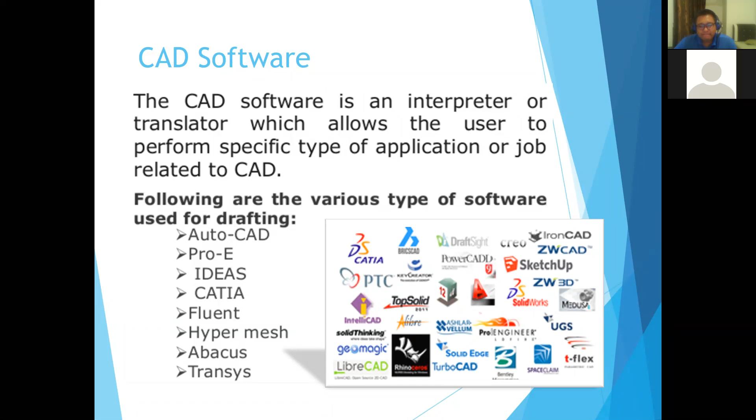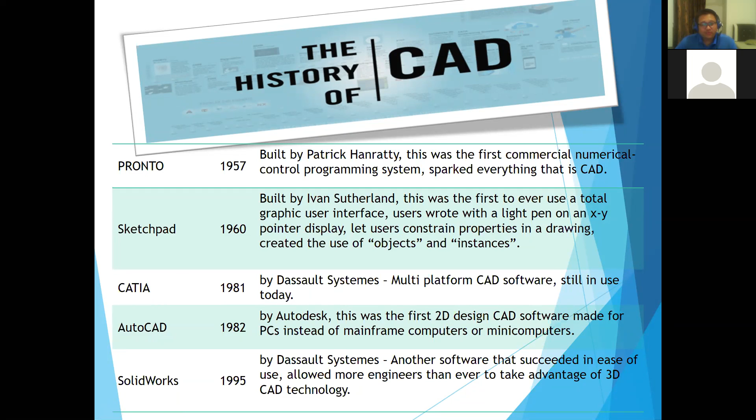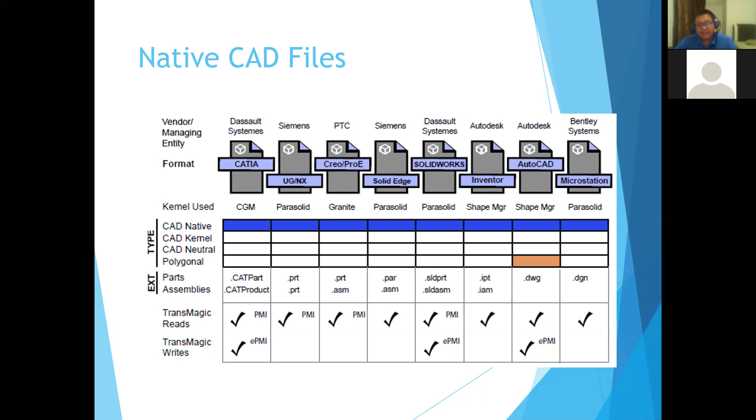And there is also a file format we call .stl. I can't remember what S, T, and L stand for, but that file is very useful because you have to save your part design in .stl format so that you can transfer it into the slicer software. Slicer software is the software that generates the G-code for the 3D printer. And it is a common part that may appear in your life as an engineer.

Unlike the 3D printer, where you do the reverse. You are not starting with a block. You start layer by layer, adding material. This one, you subtract material. Cutting means you remove material. But with a 3D printer you add, layer by layer basically. It's like a CNC machine, doc? CNC machine, subtract, yes. You remove material, you cut the material.

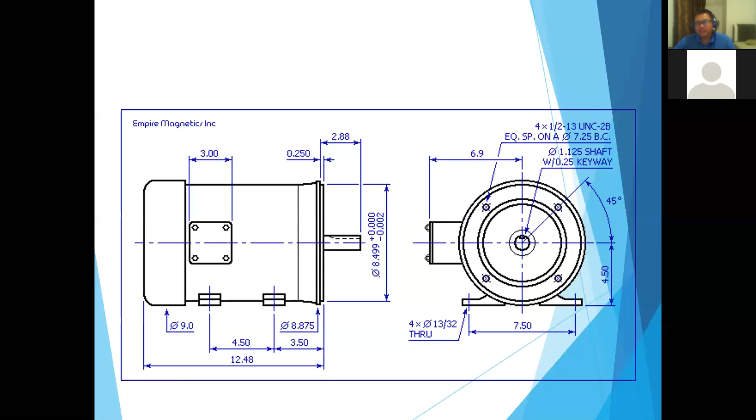Okay, and as I mentioned earlier, the software that is available out there is designed for a certain purpose. Okay, we start with AutoCAD.

Right now, okay, last time AutoCAD you could only do 2D drawing. Until around 2005, they started to work on the 3D version for AutoCAD. Before that, it's just 2D, because I learned when I was in UPM in early 2000. We also had AutoCAD, the version R14 if I'm not mistaken, and that one is only 2D.

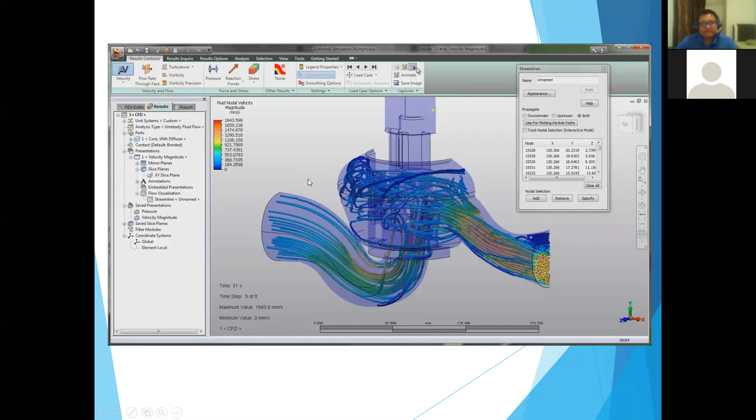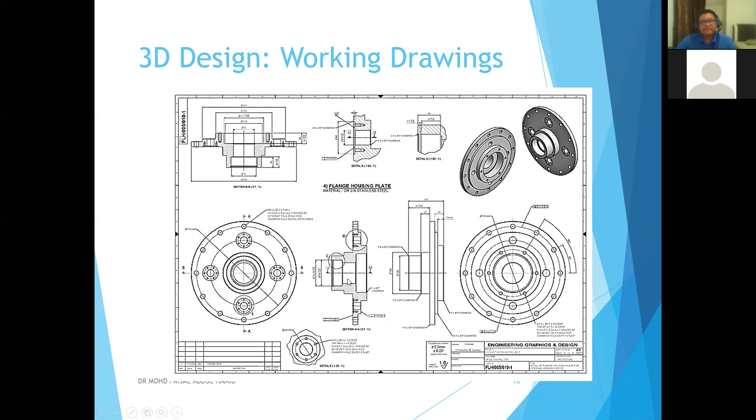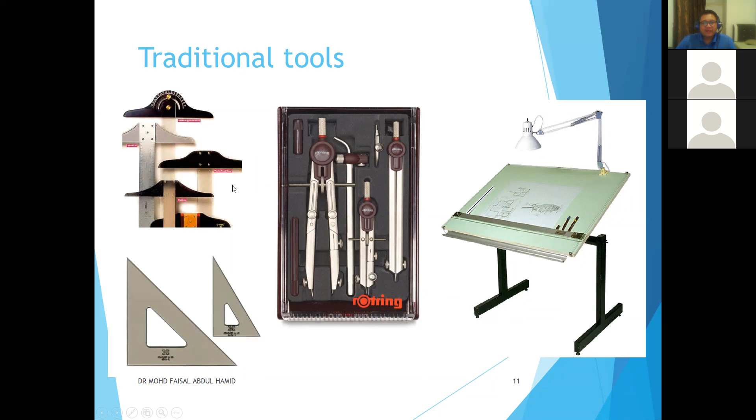Don't produce the parts without doing the assembly drawing first, because two things can happen: the part may not fit with the design, or worse, you may be unable to do the assembly because some screws can't be reached—the position of the screw might be behind a certain object, so you can't reach that point.

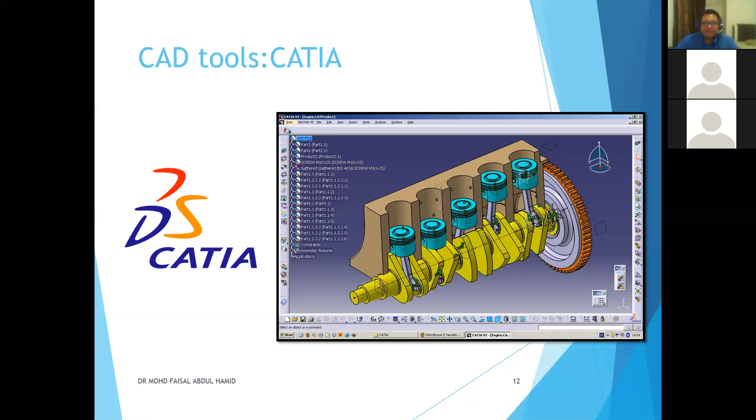Yes, you can produce 3D parts with AutoCAD, but I did try using it. Even on my computer here, I think I have AutoCAD pre-installed when I bought this computer—I'm not sure whether it's genuine, but it's there. I'd say it's close enough, just behind SolidWorks in terms of user friendliness. Last time the 3D capability of AutoCAD was worse, but now it's getting a lot better.

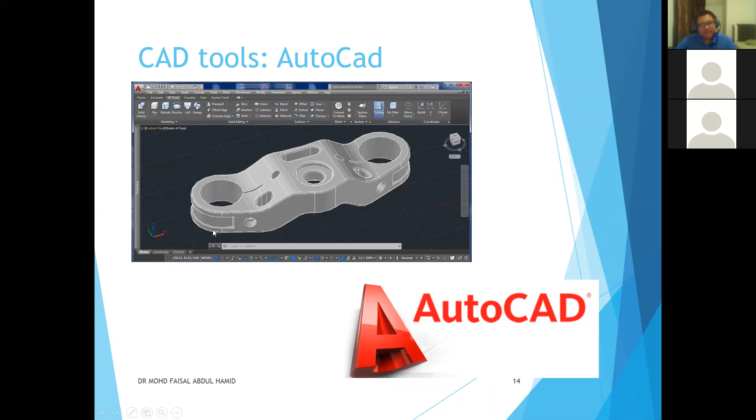The advantages of having computer aided design: of course it is an advanced drafting tool where you don't need a T-square, a mechanical pencil, and so on to do the job. You can visualize your product, navigate and look at many angles on the product you have produced, and it helps improve data organization instead of putting everything on a big drawing like A3, A2, or even A1 size.

You can save it as digital data and transfer it much easier and quicker through the internet and other communication devices. And also, if you save it as .stl, for example, you can send it to the 3D printer to do the printing for the physical part.

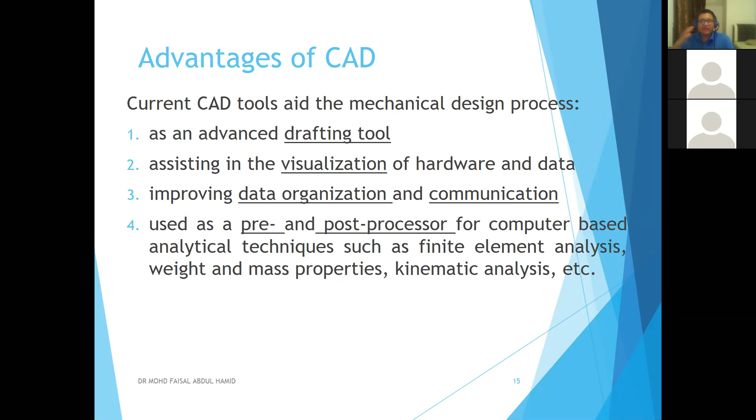Prof, I have a question. Our old method, which is the engineering drawing using the T-square and everything—is that obsolete? Do we no longer produce such sketches?

To be honest, if you are teaching a student, I'm more comfortable starting with the traditional method first, because when you design—we see the top view, side view—when you have a certain object, let's say a car, without the basic knowledge of multi-view, you will have problems knowing how to start, where to start.

You can't really know how to draw, because when you want to produce a product using CATIA, for example, you start with a plane—either front, top, or side, left or right, and so on. So if you don't have that visualization knowledge, I'd say it's quite hard. It's not impossible, but it is a hard process. But if you have the basics, there should be no problem.

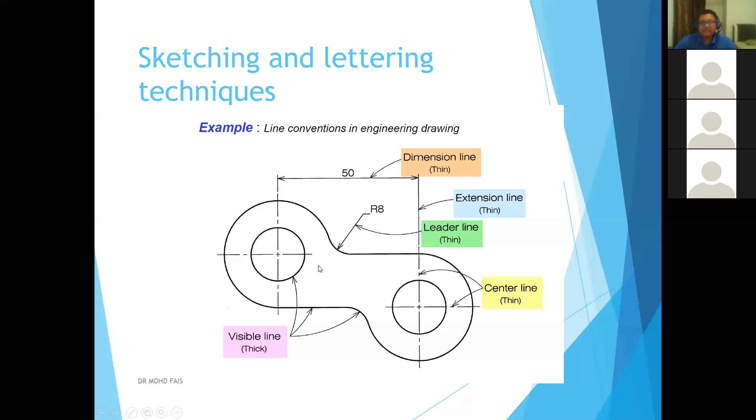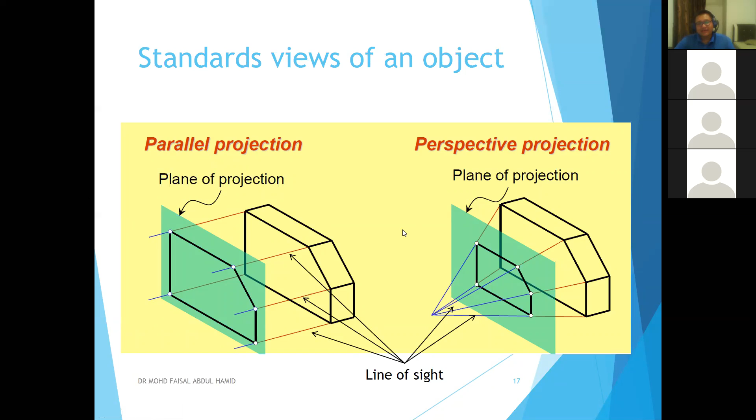This is the projection, where engineers use parallel projection, but architects much prefer to use perspective projection. Engineer on the left, architect on the right—that is the general representation. This is the line of sight.

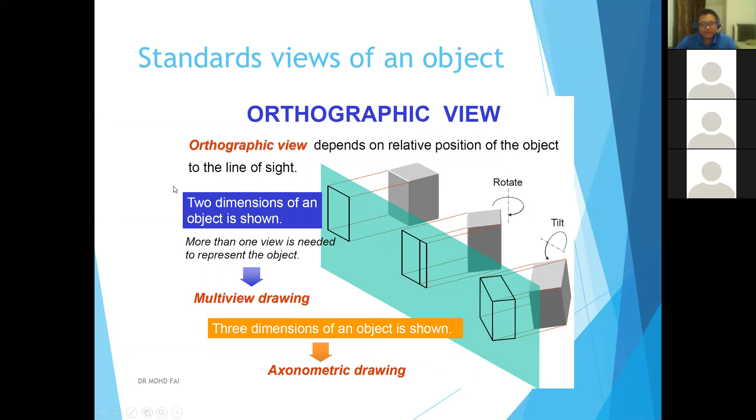And then we have the orthographic view—I think you have learned this before when you took that particular subject—and it is a type of axonometry.

We have isometry. Inside CAD software, CATIA or others, you can choose whether to display the 3D object as isometric, dimetric, or trimetric. The difference is: isometric, the angles are all the same; dimetric, two angles are the same and one is different; trimetric, all three angles are different. So that's the difference.

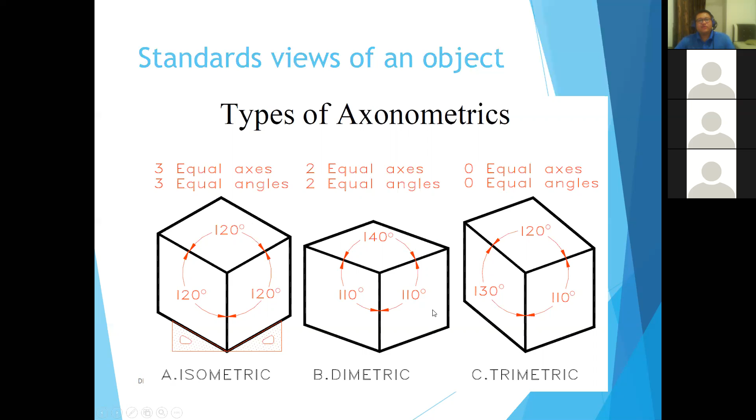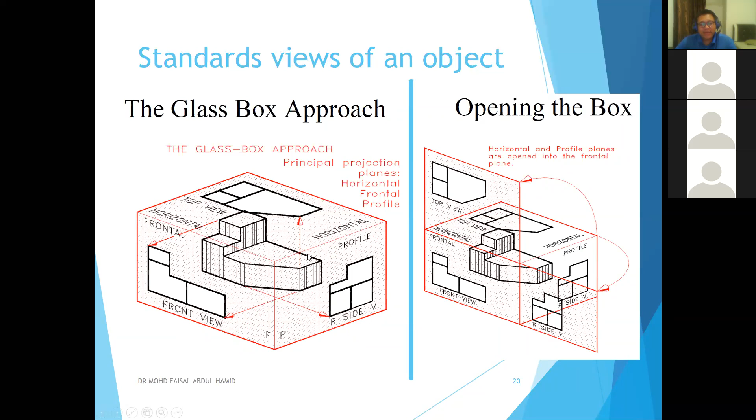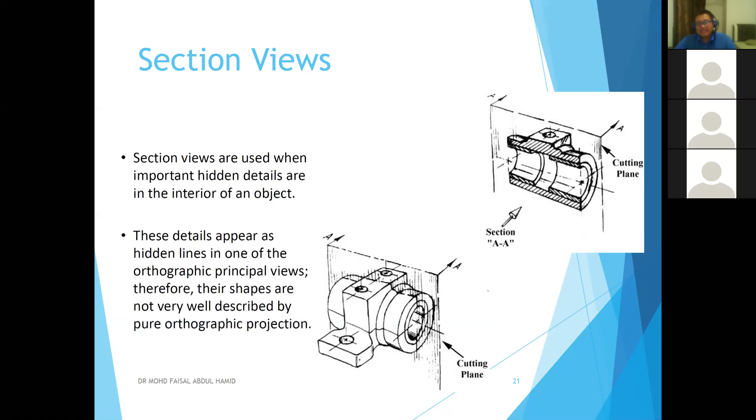The section view is purposely used to see what is on the inside. You can have a cutting plane so that you can see what is going on inside. Even better, let's say you have multiple parts combined together, and you want to see the interference, whether some part might overlap or have a gap. This can be seen easily using the section view.

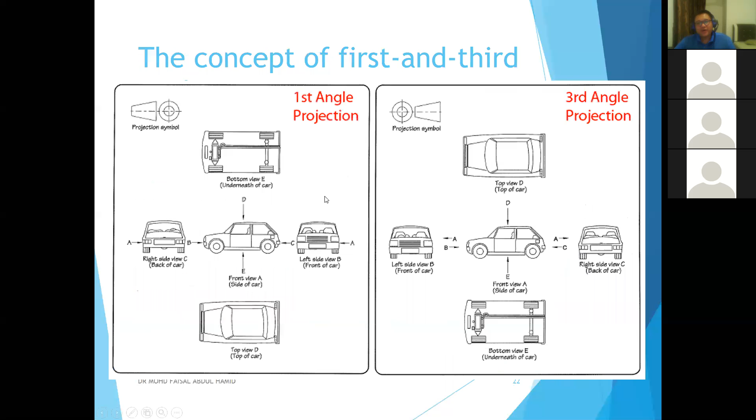I believe you have also looked into what we call GDT, geometric dimensioning and tolerance. This is very important for CAD design because it will ensure that the part can be assembled and fixed nicely.

The reason is, let's say you want to do a cutting process, or you want to print out certain parts using a 3D printer. Each machine that you are going to use has a certain limitation, the accuracy of the machine itself, so to comply with or meet that accuracy, we have to include that into our design.

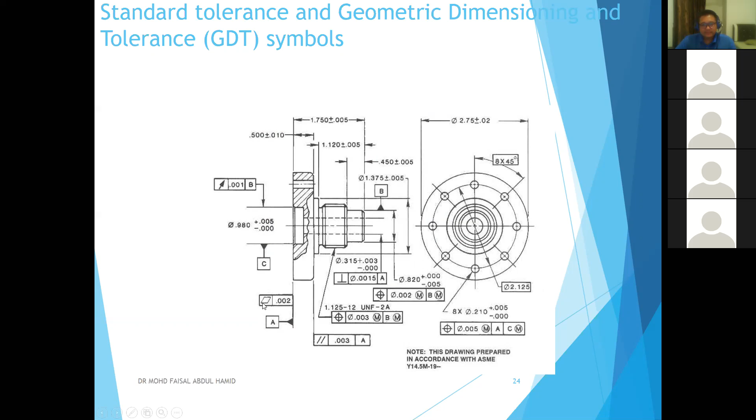Each machine has its own specification, its own precision. So that particular machine precision, you have to take into account in your design. That's why you will have this plus and minus on your drawing. This is the tolerance.

To fit this particular slot down here, there is one block that goes down to fit inside this slot. The minimum size is 0.495, and the maximum size is 0.497. You can see that this value is within this particular range, in the middle somewhere, so this part can fit into the slot easily. That's why tolerance is very important, so that when you have an assembly, it helps ensure whether your parts can be assembled or not.

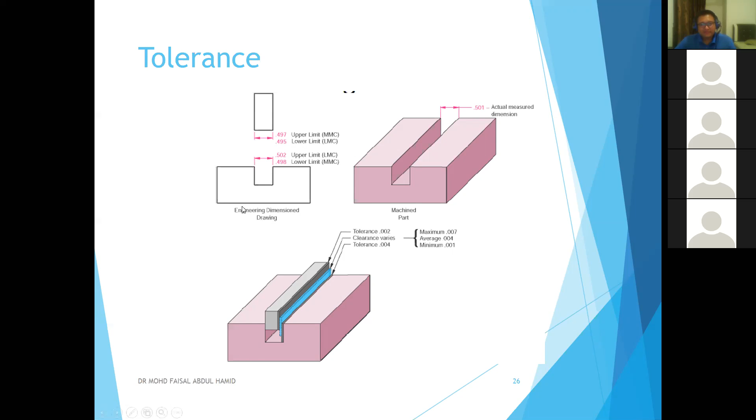Moving on to 3D printing. As I mentioned earlier, for traditional manufacturing, where we have a machine like CNC cutters and many other types, you normally start with a block. Then you cut it, and you can see that some material is removed, so you have a lot of leftover.

However, with additive manufacturing, the process is reversed. Here is the animation of the 3D printer, where the machine actually starts from the bottom. It creates one layer after another, and goes on and on until it finishes.

But it will also have leftover. This is because when you want to perform this printing, during the printing process there's what we call the bed, the printing bed, the square shape down here. There is a printing bed, and it will be heated up. There are two methods that we normally use.

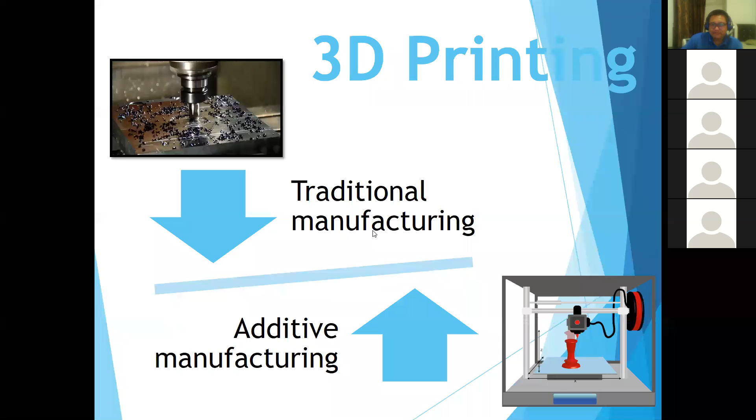But the fundamental issue is that the melting temperature of ABS is different compared to PLA. If you set this heated nozzle to around 180 to 200 degrees, then it is for PLA. But if you increase the temperature to like 190 or 200 to 220, then it is suitable for ABS. So the melting temperature is different.

That's why I don't think that will work as it is, unless you have a very complicated system installed. On the current machine we have, it will not work because the melting temperature is different. Since it produces layer by layer, this layer will not join with the new layer, because one is, let's say, 180 degrees and the other is a much higher temperature. It will cause some problems.

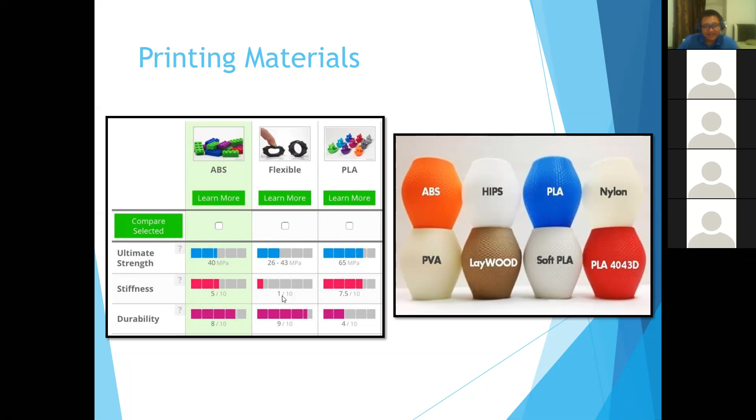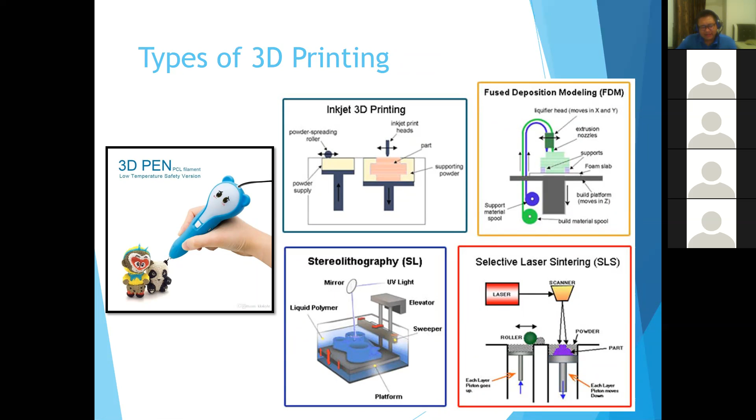So instead of using material like this one, they use some sort of powder. I'm not going to discuss this one in detail because this machine is super expensive. I think we have one that belongs to the mechanical department, if I'm not mistaken, and it cost about 1 million for just one machine. So it is very, very expensive.

On this slide we have the FDM 3D printer, and I'd like to highlight that there are two types of mechanism available: either Cartesian or delta. With Cartesian, there is a motor down here, on this side, and up here. This motor controls this motion, the motor on this side controls this, and the motor up here controls up and down of the heated bed, located here.

For the delta machine, down here is the heated bed, and up here is the heated nozzle where the material goes down. On this machine, they use some sort of actuator to control the motion of the heated nozzle.

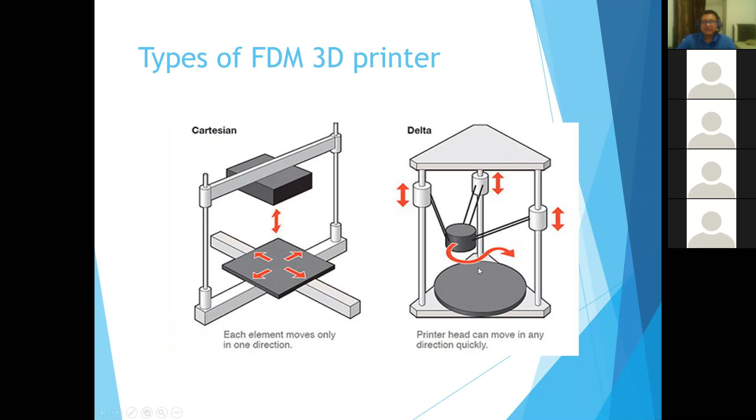Okay. Generally, people prefer this one, this machine, Cartesian. But let's say you want to print out a vase for your flower, right? A vase or labu sayung, for example. Then this machine will do much better compared to this Cartesian one, because this machine is superior in producing a product which has round shapes. Okay, so that is the general difference.

Okay, this is the basic filament that we have. It is a roll. One roll is 1 kg, and then the yarn, I don't know what to call this one. The yarn will be fed through this feeder, and inside this feeder there is a small motor that will push or pull this particular yarn, push it upwards. If we refer to this image, it will push upwards away from the spool, then going here, and push the yarn into this printing head, and inside the printing head we have the heated nozzle.

Later on, after the PKP or MCO has ended, I can bring you guys to the lab and you can see the machine physically. We can let it run, you can feel it, and you can also learn how to use it on your own.

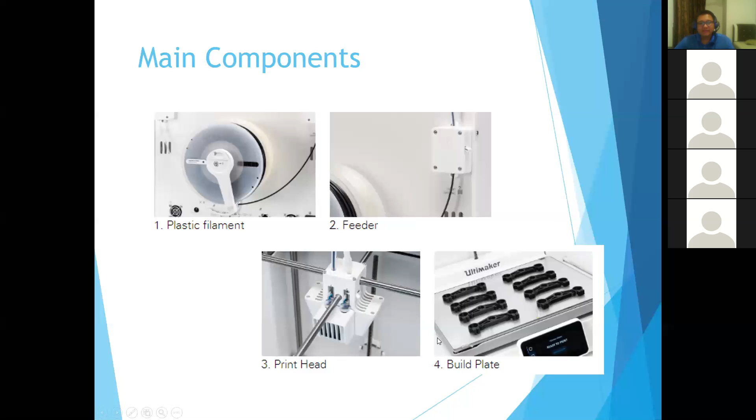Okay, how does it work? Of course, start with ideas. If I link it with our course, it may start with the requirement analysis. You do the survey, Pareto, and then QFD. You get all the information, then proceed with the morph matrix, and after the morph matrix, you analyze your concept using the Pugh matrix and also TOPSIS to get the final specification or final design concept that you want to produce. Only then do you start the CAD design. So what we have learned is this part.

After the CAD design is completed, you will use the slicer software, or what people also call 3D printer software, to generate the G code. Don't forget, when you do the CAD drawing using CATIA or SolidWorks or any other CAD software, make sure you save that file as .stl. Then you can transfer that file into the slicer software. In the 3D printer software, you need to specify the orientation of the printed object, the scale of the object, and some other required setups.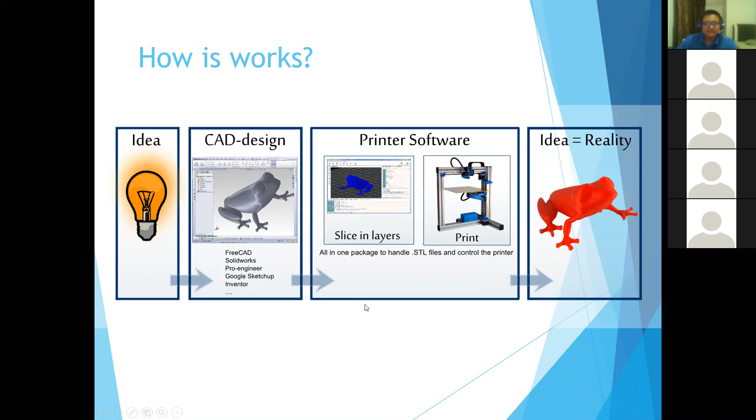It will take a while, depending on the dimensions, accuracy, and many other things, like the printing speed and the heating process. All those parameters will determine the time for the printer to complete the printing. And finally you will have your product. If it is a frog, then you get a frog. That is the more specific process that I explained just now.

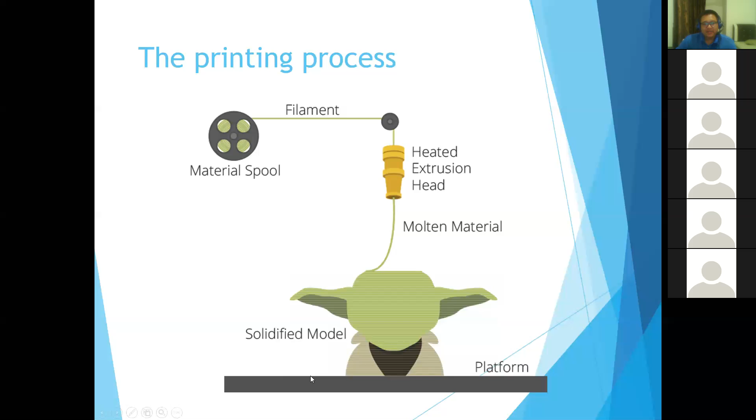Another way to visualize it: you have the material on the spool, normally 1 kg, and it goes through this feeder, which will push or pull the filament into this heated extrusion head, which we also call a heated nozzle because its shape is like a nozzle. Then the filament will melt and be deposited on this platform down here, the heated bed, layer by layer.

Okay, and 3D printing software. Just like CAD software, there are many types of 3D printing software. I list them up here, and it depends on who you are, whether a beginner or an advanced user, and also your operating system, OS.

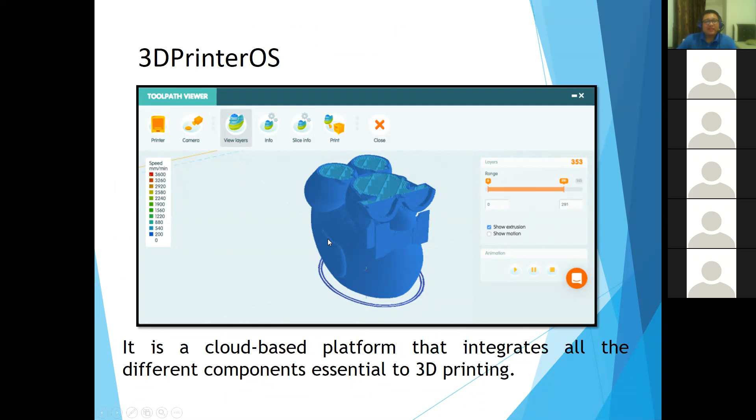Okay, 3DPrinterOS. Here, it is a cloud-based platform that integrates all the different components essential to 3D printing. Okay, it is a cloud-based platform. And then this one is called Craftware, developed in-house by a 3D printer manufacturer.

Normally, okay, this one I would like to highlight. With certain printers, you can use any apps, most of the free apps that you can download. But with certain printers, you can only use their dedicated software. It will not work with other software.

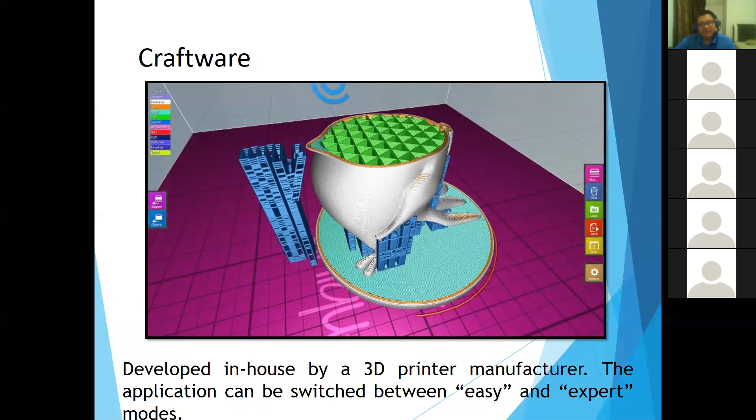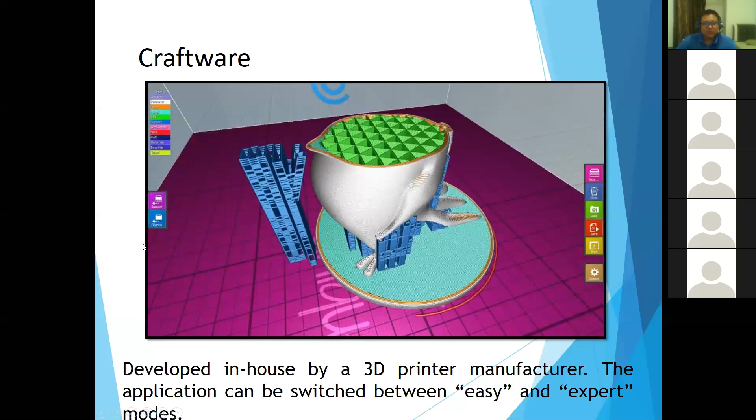And another type of printer, they have their dedicated software as well as dedicated printing material. You cannot change that. So for me personally, you'd better buy a 3D printer which accepts any software and any type of material. So you have freedom. Otherwise, you will have a problem getting the material and updating the firmware. Okay?

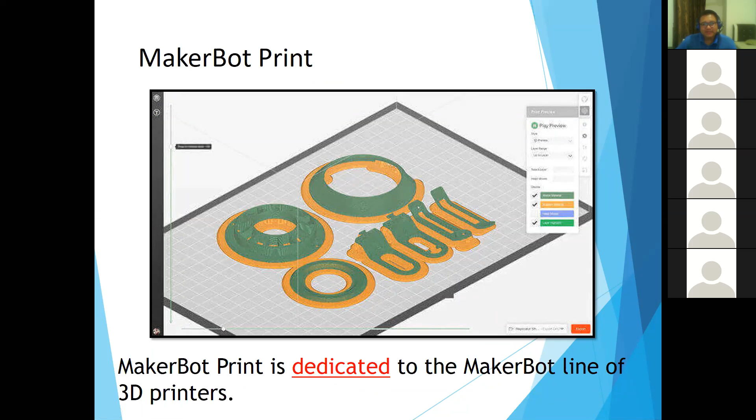And this one is MakerBot Print. The software is dedicated to the MakerBot line of 3D printers. So I'm not really happy with this type of machine. Okay, and then SelfCAD, 2-in-1. It allows you to design your own model and set it for 3D print. I would say this one is good for your kids at home, if you plan to buy one small 3D printing machine.

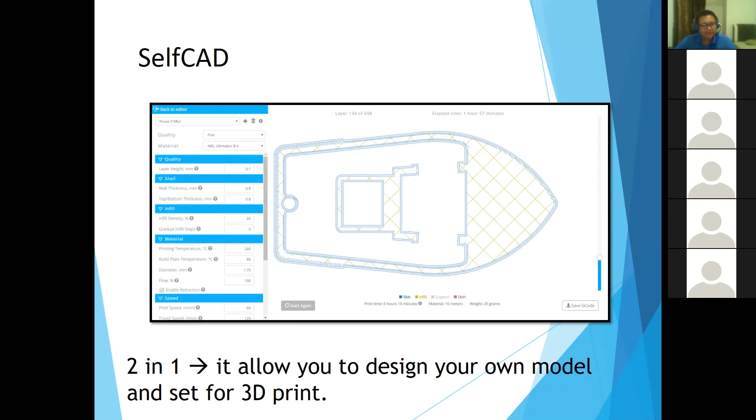A good 3D printing machine that you can buy right now is called Ender 3, Ender 3 Pro, and it costs just under 1,000 ringgit. You can buy that one, it is a pretty good one. I have one in our lab, the aerodynamic lab.

And this is the software that I'm using right now, Simplify3D. This is not free. You have to purchase this particular software. Right now, I have 2 licenses, and it cost me around 500 to 1,000 ringgit. I can't really remember, but it cost me less than 1,000. It is a lifetime license, perpetual license. No need to renew.

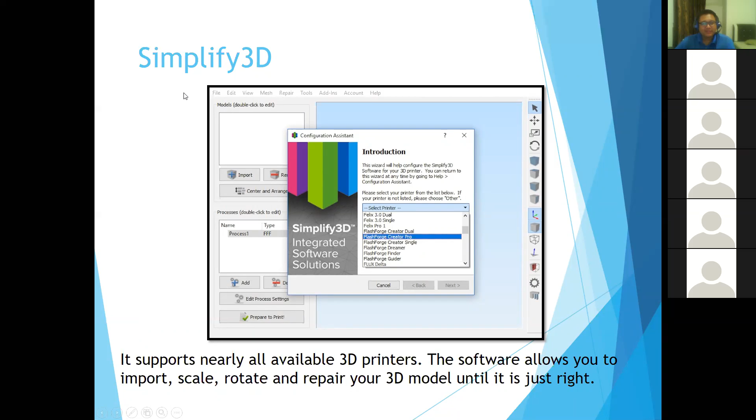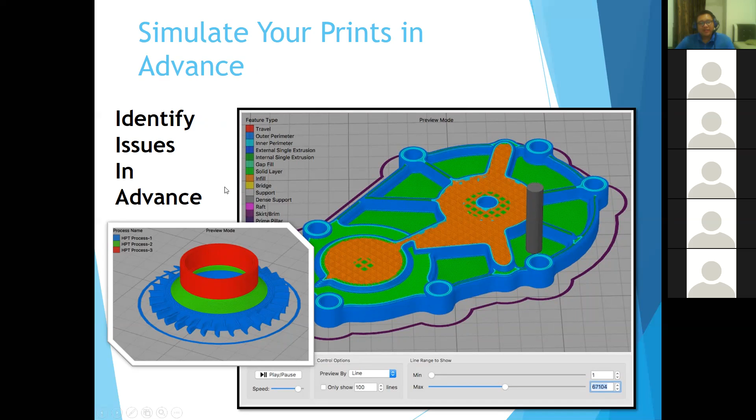And this particular software will work very well with many types of 3D printers which are not the dedicated type. And with Simplify3D, and some other software as well, not all, you can simulate the printing process so that you can identify issues in advance before you start the actual printing process. So it is very useful.

Okay, now if you recall just now when I talked about the traditional method of producing parts, where you start with a block of metal, for example, then you send it to the machine to do the cutting, right? Then you will have leftover, and there is a lot of leftover. For 3D printing, you will still have some leftover, but it is very minimal compared to the traditional method.

It is not 100% clean or totally zero waste. With a 3D printer, you still have some waste. The reason is, when you print something, let's say an object that is very thin and tall, then during the printing process, the bed will move sideways.

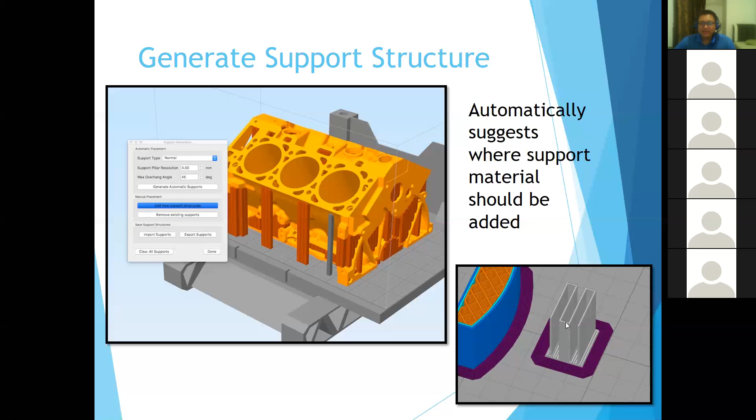And if you have a very tall object, you might need a lot of extra surface, so that your product will not fall off. That's why you have this kind of skirting, the outer layer here, to let your parts or your product adhere to this particular surface.

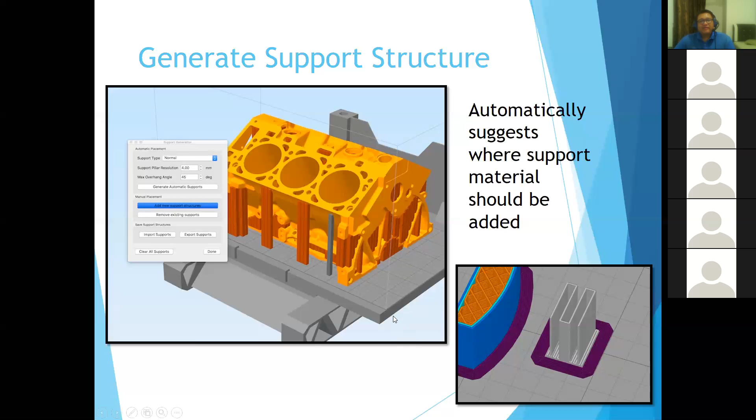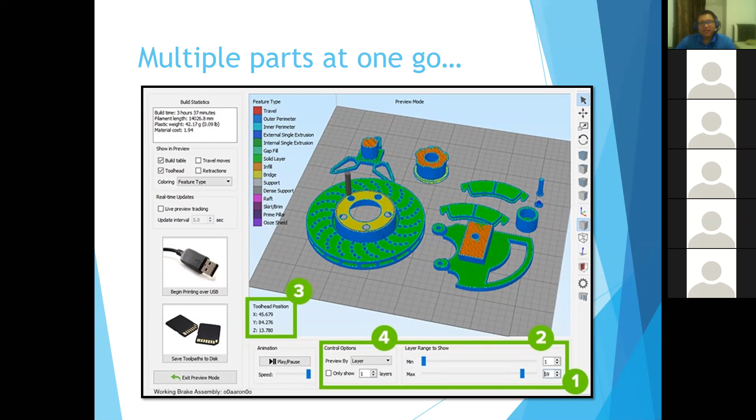And you can print multiple parts at one go, but for beginners, I think you have to do it one by one. Don't do this process. Probably after at least 6 months or 1 year of being familiar with using a 3D printer, then you can start thinking of printing multiple parts at one go, because you need a lot of experience using that particular machine. Every machine has different characteristics, so you have to learn them first.

Variable printing settings, I don't want to go deep into this one. This one is very important. Just now we saw a frog, right? You might think that inside the frog is hollow, nothing inside, or you might think that inside the frog is full of material. But you can control whether it is hollow or solid inside the body of the frog.

Here there are options. You can put 10%, 15%, 20%, 50%, 70%, or any percentage of material inside that object, in this case the frog. This is what we call the infill density, the density of the material inside the object, and you can control it using the slicer software or 3D printer software. There is an option for you to control that density.

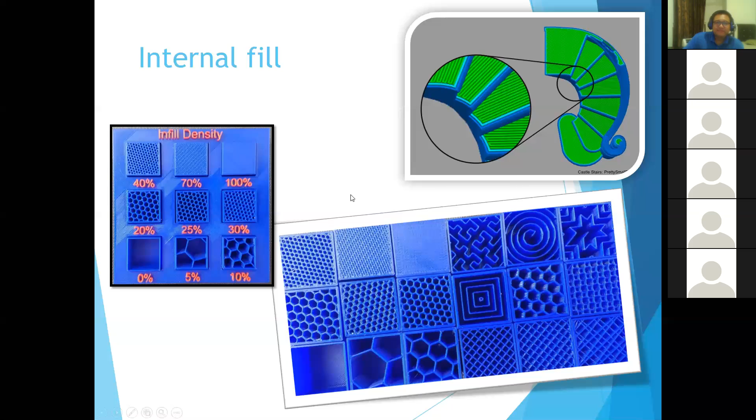So that's why I told you that you need a lot of experience using the 3D printer. Then you will appreciate how to select different types of inner shapes, inner layers. Okay.

And last but not least is a typical 3D printer, the cheap version. It is very exposed, like this one. So if you want to put it at your home, keep it away from your kids, because there is a moving platform here, a moving object, and also a very high temperature nozzle on this part.

And also the bed is about 60 degrees. So you need to ensure the safety of this particular machine, because when you produce something, small parts, it will take like 1 hour, 2 hours to produce. But complex geometry, with a lot of curved shapes and a bigger object...

It may require even up to 1 or 2 days, non-stop process. Last time I tried up until 2.5 days to complete. And sometimes the printer cannot do it. After 2 days, it will become haywire, and there will be an error. So try to design something that can be produced within reasonable time, less than 6 hours I would say, should be good.

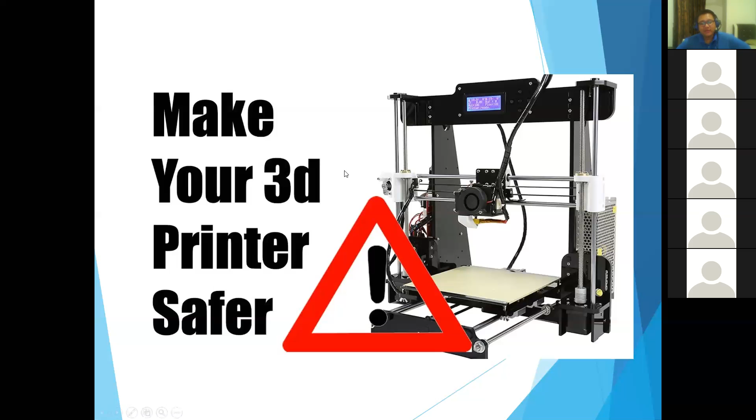And it requires a very challenging process to remove all this, because you need to reheat the nozzle. At the same time, you have to slowly remove this chunk of material. And it's good if you have proper tools to remove this material, because when you remove it, it is quite hot, over 100 degrees Celsius.

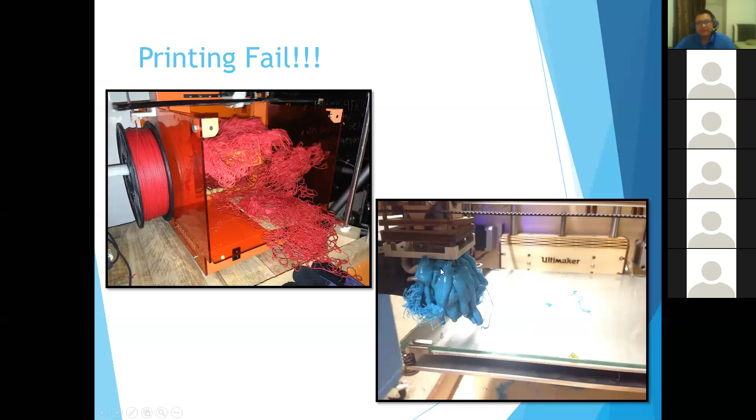And this is my 3D printer at the fabrication lab that needs to be repaired, because I have a problem with the power supply. Thank you for your attention, and that's all for the 3D printing that I can share with you. I hope you will get something, and hopefully you can get the experience of using the machine.

Doctor, that's all. Can you give me a rough price for the 3D printing? I mean, if I am to give a job to someone else, like if I send something to a shop to 3D print, how much would they charge, maybe, for something 50 mm by 50 mm, and the thickness is like 5 mm?

Normally there are two parameters that people refer to when they want to charge for producing that particular part. One is how much material they are going to use, because the material, you buy roll by roll, one roll is about 1 kg, and the price is around 100 ringgit, depending on the material. The other one is how long the process takes to produce that particular printing. So those are the common two parameters that determine the price.